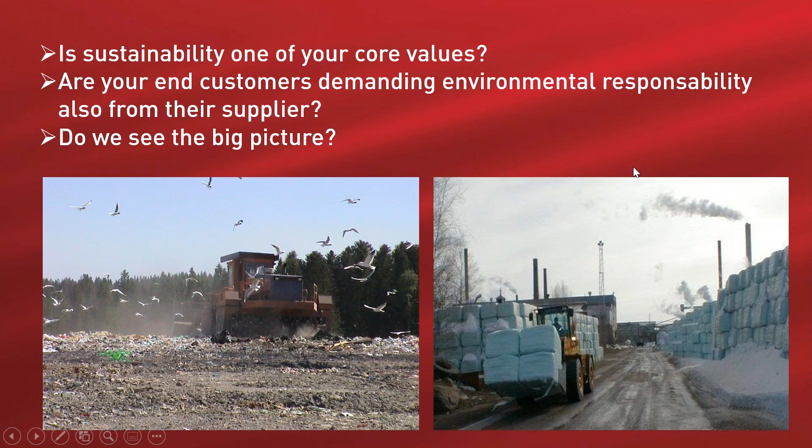You might like me to comment? No, we will go into that in our presentation. All right, you probably remember.

What is the level of efficiency and safety in your material streams, such as your raw material, recycled fiber, pulper reject, and pulp itself? What are the environmental and safety hazards caused by these streams?

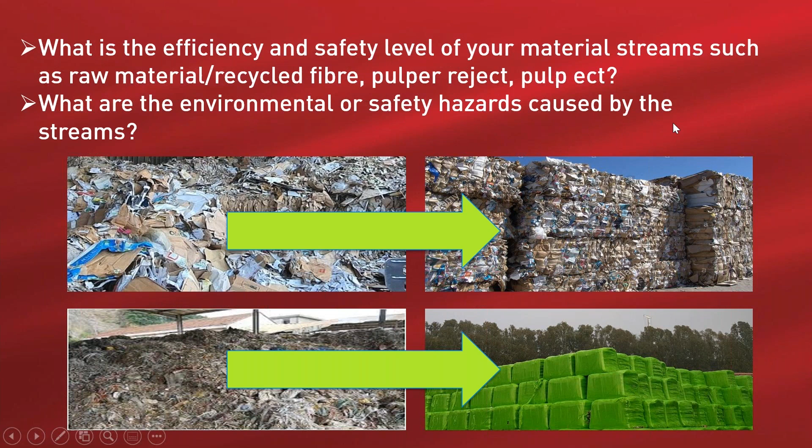So, thirdly, why add metal wires to the pulper process? We have to say that we are not specialists in pulp itself. We just do the machinery before and after, but that's a good question, Martta.

Exactly. And to highlight, we are mostly specialists in recycling. We will leave it to that and come back to it in our presentation.

So what is the economical and ecological cost of letting the wires into the process? Wouldn't it be better to recycle and profit from the bale ties? Just questions. Good question, Martta.

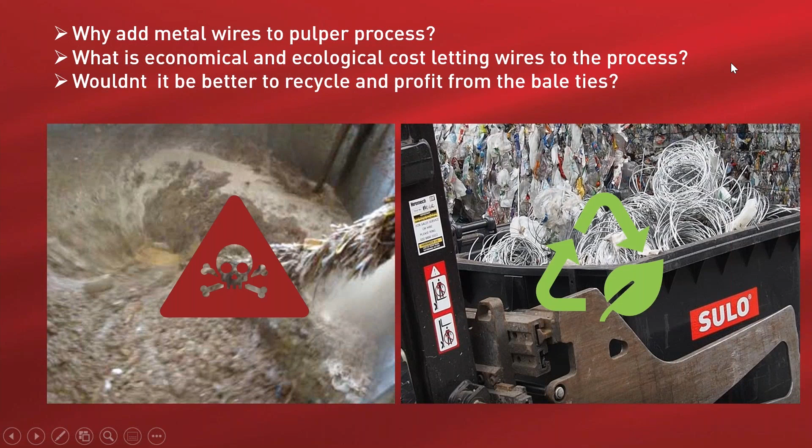All right. And then when we look at these pictures, do we see pulper reject as a valuable resource or costly waste to be landfilled?

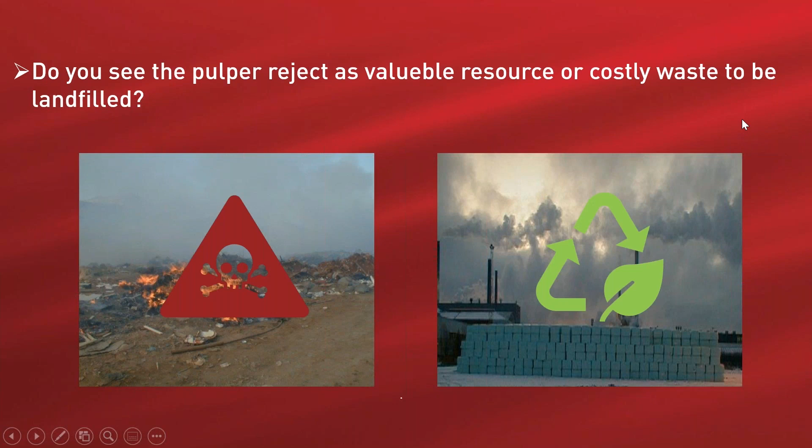So there was our warm-up questions. Okay, we are talking about the zero landfill solution for stock preparation for the reject. And here you see our roadmap, which is kind of invented by us. Well, not really us. This has come along with our customers in the past years that we have been adding services for their requests, and as we saw earlier, there are plenty of customers who are responsible for their operations.

Today we will start from stock preparation to pulper reject handling, reusing the pulp and not ending up at the landfill. Then we will go from the pulp process to the handling of pulp, the efficiency with Cross Wrap solutions.

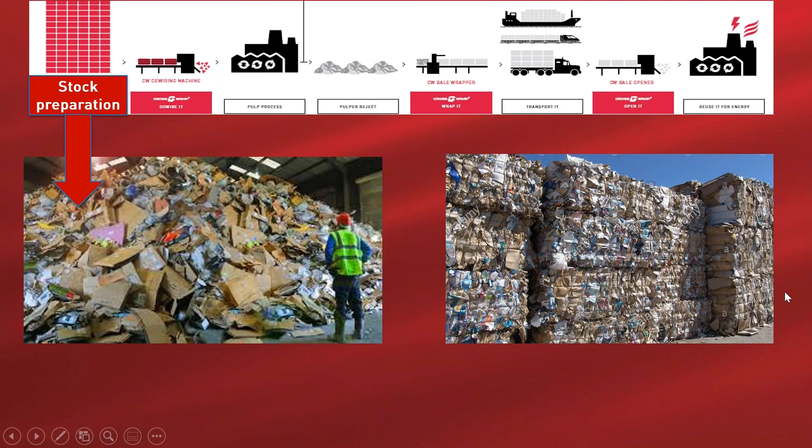Talking about stock preparation, here on the left we see a picture where we can see loose material which either came loose or has been opened to be loose. This creates a possibility for animals and bugs, needs a lot of machinery to operate with, needs a lot of room, and of course with loose material the risk of fire is bigger than anywhere else.

Compare that if your stock will be on decent density bales - it's easier to stock, makes more sense and value when you need less space and need less operators. It's just putting the bales into the dewiring system and getting them in a process, and recycle the wires before they go in.

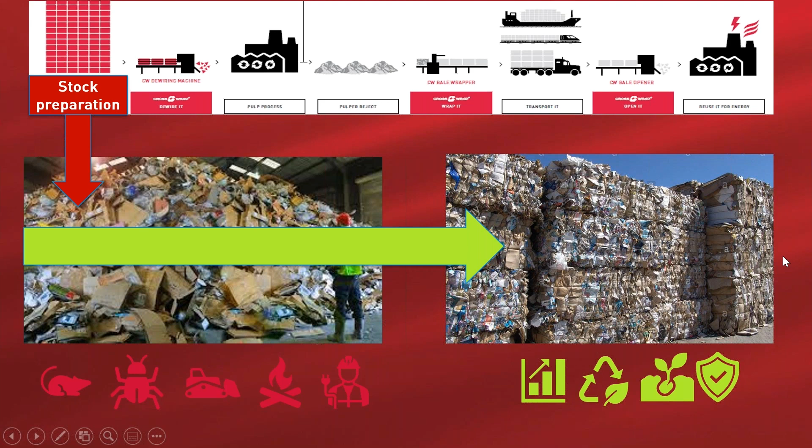Yes indeed. Safety above all.

So after stock preparation, we need to open and feed the bales in some kind of way. With Cross Wrap, we have several solutions for how to feed the bales efficiently and avoid the big loose material causing the problems Kalle mentioned before.

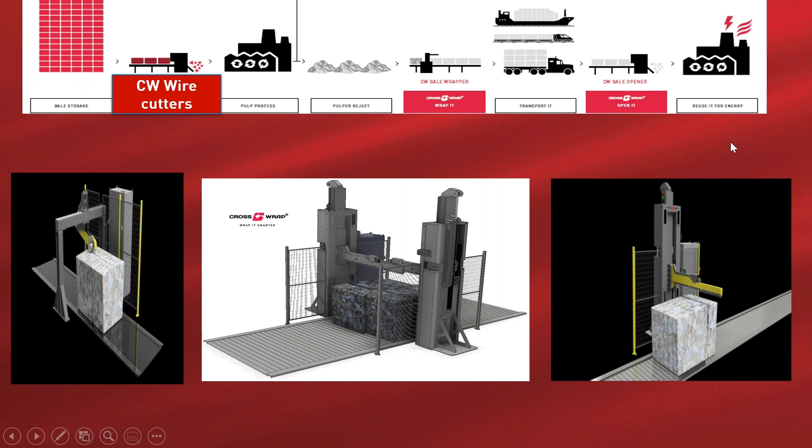Here we can see our wire cutting solutions. We have different kinds of cutters, from rotating upper cutting to linear cutting from the top. But better than me explaining, let's have a look at a video.

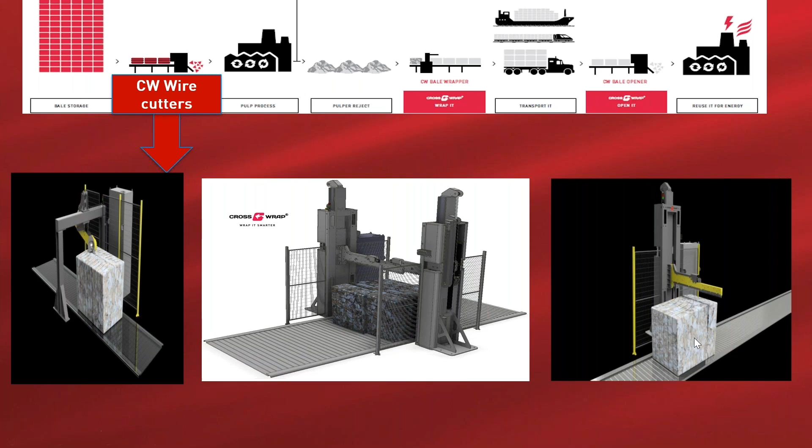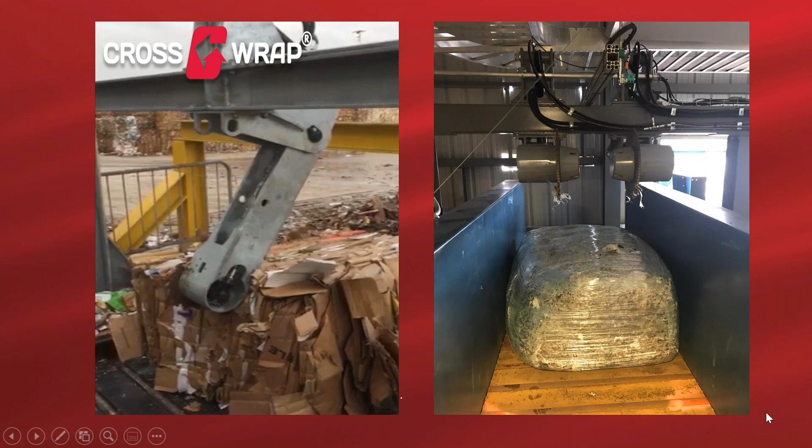So these wire cutters cut the wires automatically. Here it's a system which just cuts the wires on a conveyor. We see a couple of examples from Saica where they cut the wires just before it goes to the process. On the right-hand side, you see Georgia Pacific in Oregon.

It's a great system where they have wrapped bales with materials which might otherwise go to the landfill as an alternative, but here it would be used.

So we will see a video of how that kind of cutter works in both cases - it's just a simple cutter, but it helps by not needing manual operation, and of course creates efficiency for the production of the pulp when the wires are cut upfront, making for easy operation.

On the right-hand picture you saw earlier, a similar machine, but that was cutting bales which are wrapped tight without ties, whereas in this case we use wires.

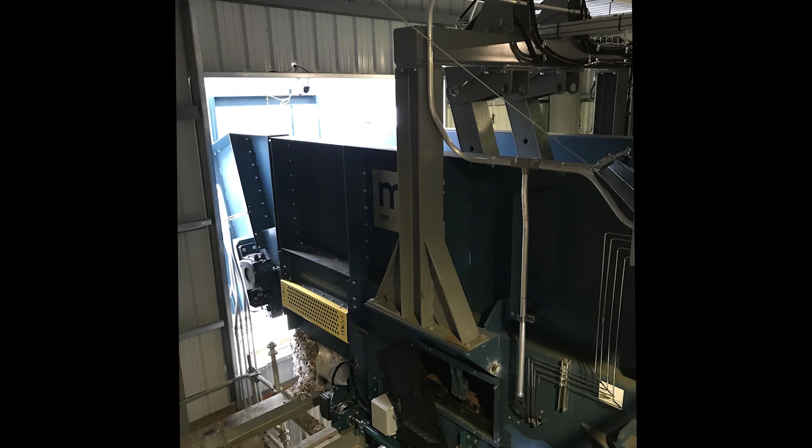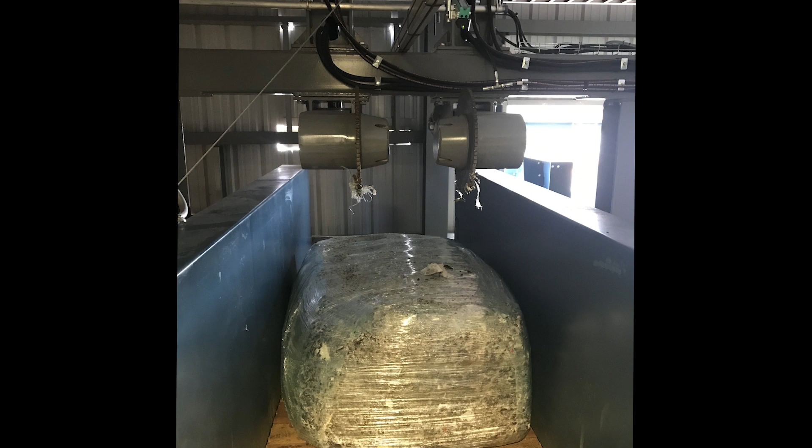So this is just a few pictures of that kind of machine, which we do for - well, it's a similar machine, but it opens the wrapped bale to be used in a process by Georgia Pacific.

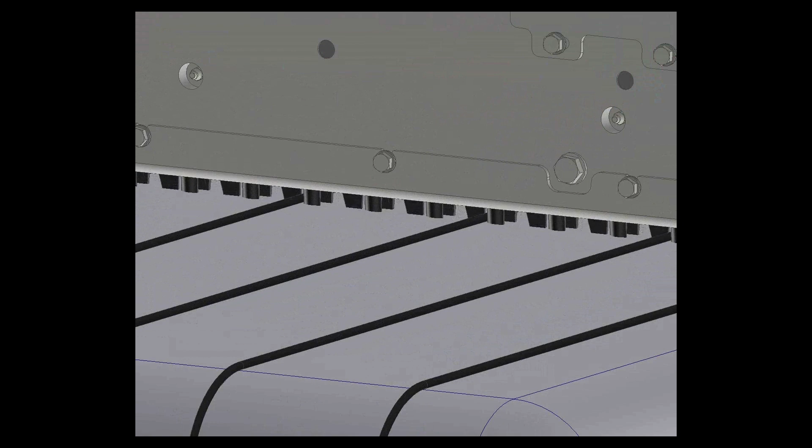Here we have a top cutter, which is the same cutter we use later on - you will see it in this dewiring system. It can be used there too, a similar operation. It's one of those units we have available for automated processing of paper bales or OCC, whatever your bales are, wired.

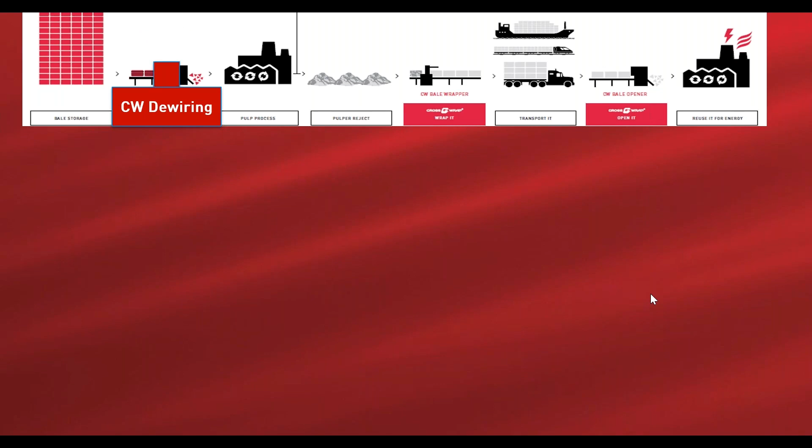And from these wire cutters, we can move on to the dewiring unit itself. When we want the highest efficiency for feeding the fibers, we have developed the Cross Wrap Dewiring, now delivered to over 60 customers worldwide, and it cuts, separates, and coils the wires automatically.

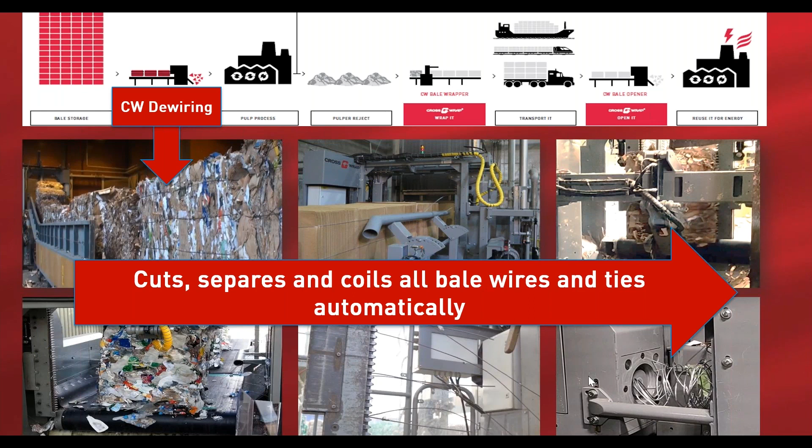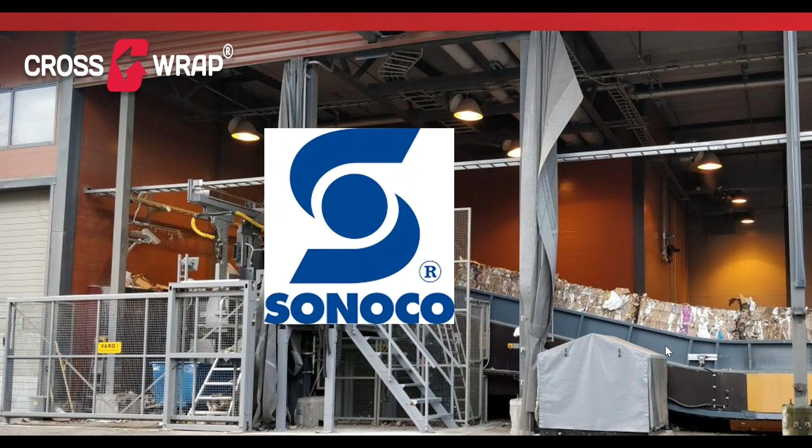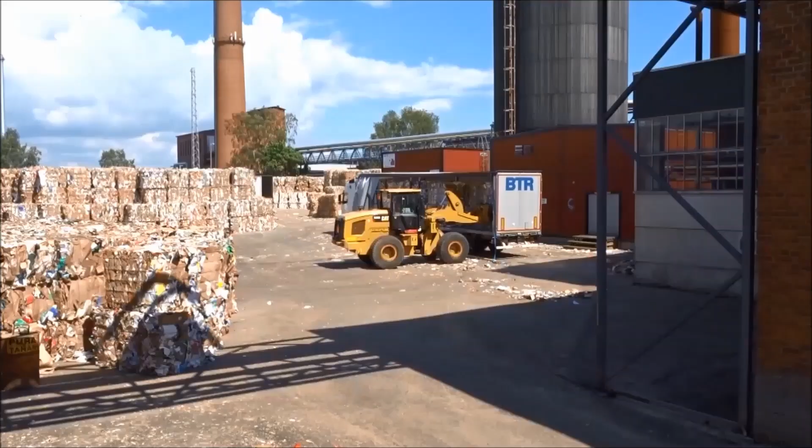Also, to get a better picture of the machine itself, we will watch a video. This video is our reference here from Finland. This is a Sonoco plant here in Finland.

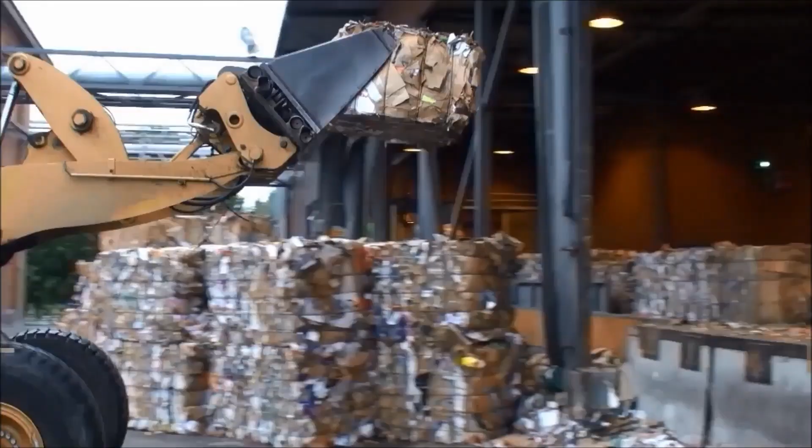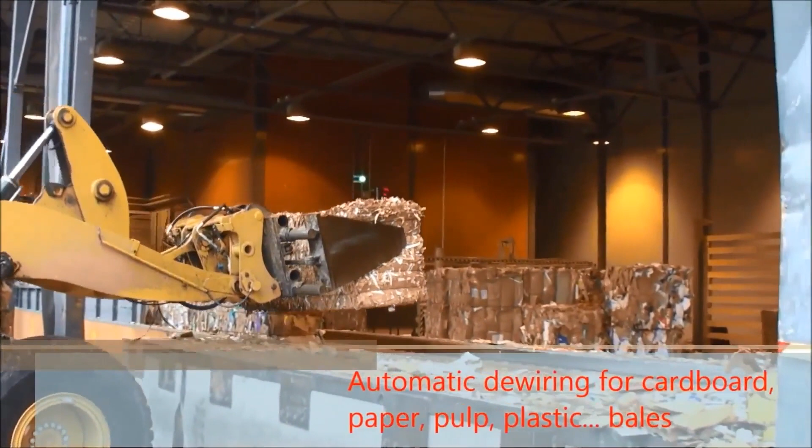In this case, the feeding conveyor itself was an existing one, so we are highly flexible on our dewiring solutions. The dewiring unit itself is very flexible in layout terms and space-wise, also for existing plants. We also provide solutions for the feeding conveyors as well as output conveyors after the dewiring.

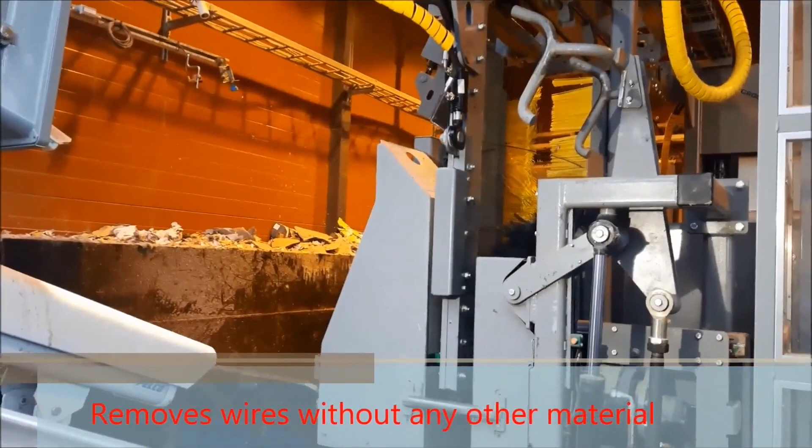How the dewiring works is that we run the bale in with the conveyor. We have grippers coming from both sides, taking hold of the wires. Then we cut from the front with the front cutter. The grippers move aside, after that we move the material forward, let go of the wires from the other side, and coil them up.

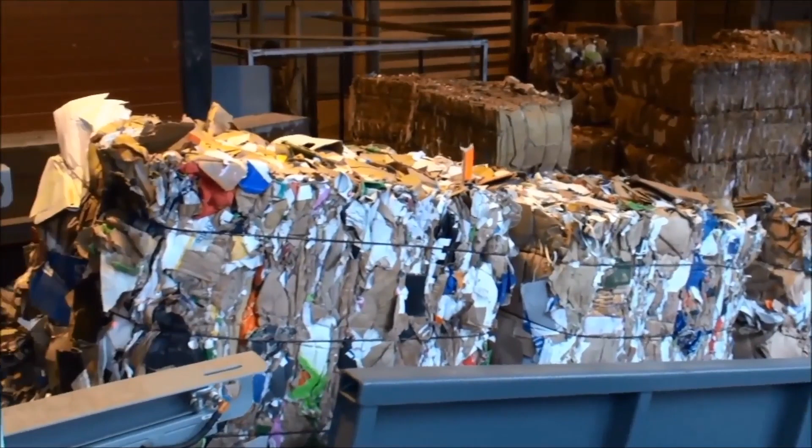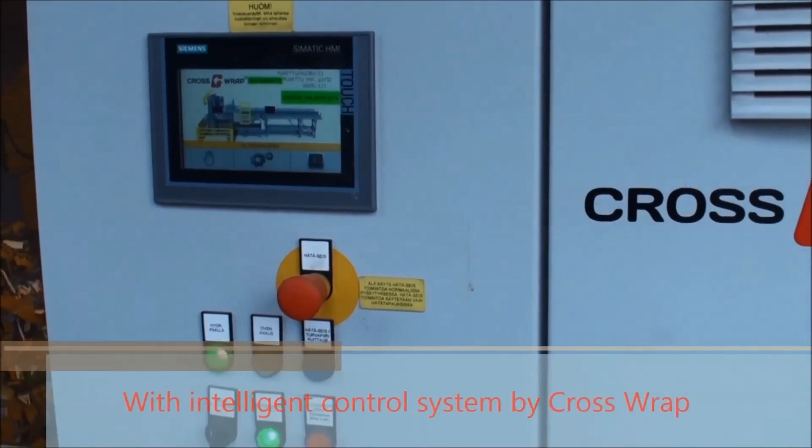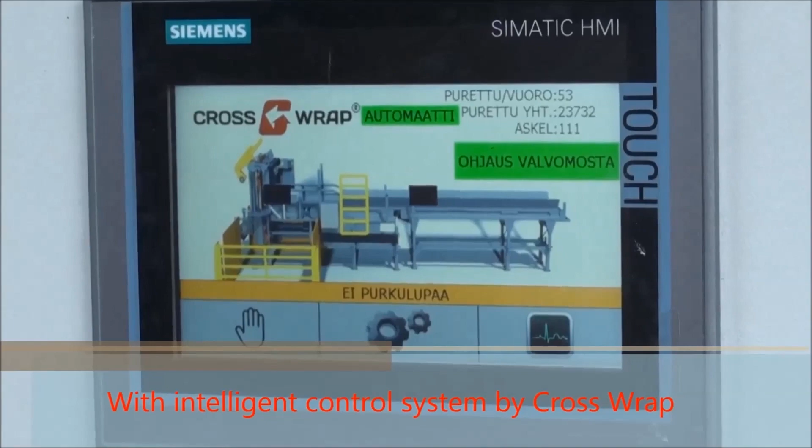Also, the intelligence of this machine is the leading edge. With all of our machines, we deliver a remote access device, giving us the benefit of doing all program updates and services remotely. And we use the newest PLC of Siemens, and as the customer wishes, there are optionals for that.

Yes. So if you have more detailed questions about the dewiring, please write them down for us and we will answer those as soon as possible.

As you did see, the big benefit in our dewiring compared to conventional ones is that we grab the wires and then cut, and then we collect them to the side, which is a big benefit and gives more reliability and a higher percentage of dewiring than machines that have been available before us.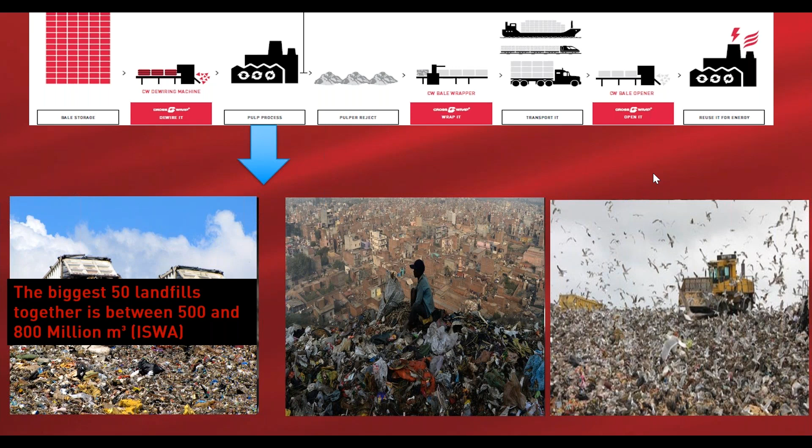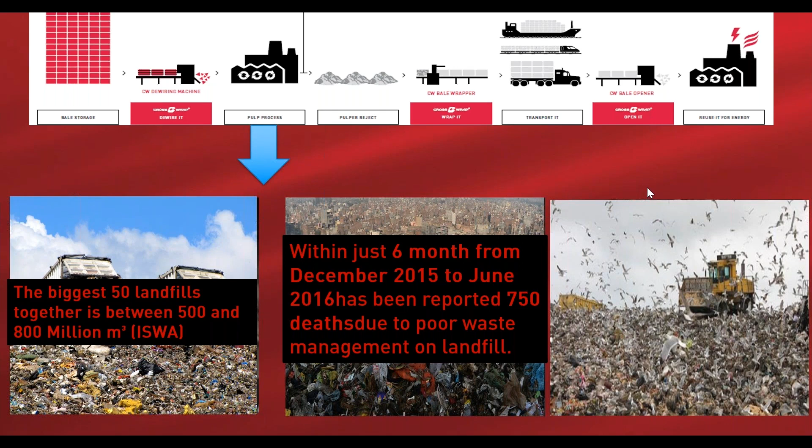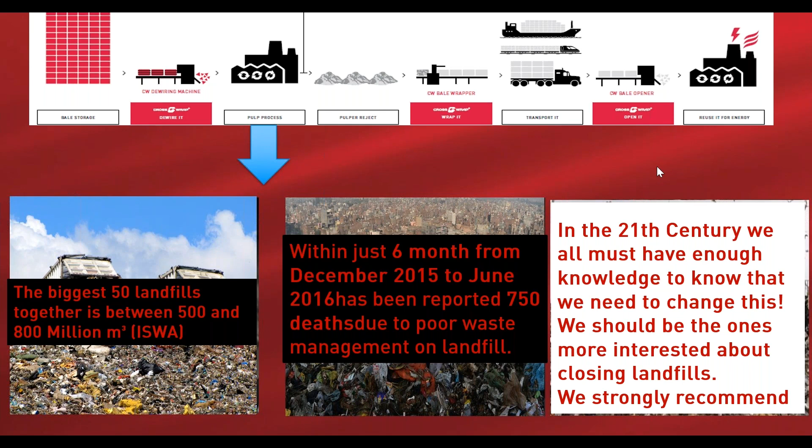A few facts about landfilling today. According to ISWA, the biggest 50 landfills together are around 500 to 800 million cubic meters. Within just six months, from December 2015 to June 2016, there were 750 reported deaths due to poor waste management on landfills. Today we have the knowledge that this has to be changed, and we are here to change it with you. Not to mention landfill is one of the biggest climate change pollution sources on earth.

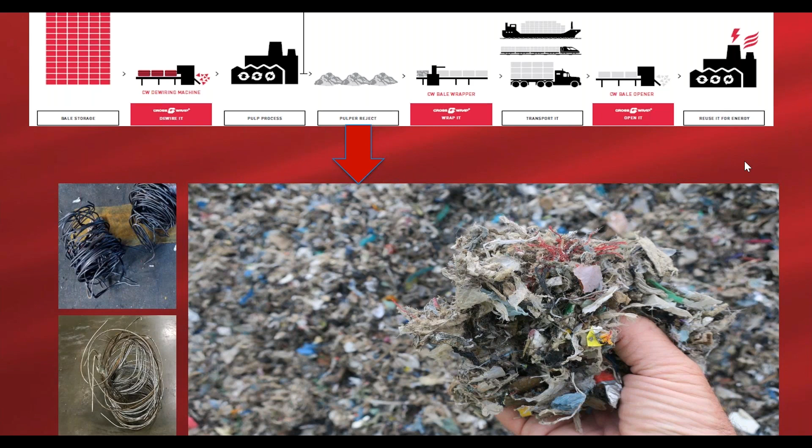Exactly, so rather than seeing the pictures we saw before, we could be seeing this. Instead of costly landfill material, we could be seeing a resource. Is alternative fuel one of the business solutions? We do believe it is, also for the paper industry. Here we see our wrapping systems serving customers for alternative fuels, where we can effectively pack the material in different ways and for different reasons. All this goes for energy use, so it doesn't end up in the landfill. That's the aim of the process.

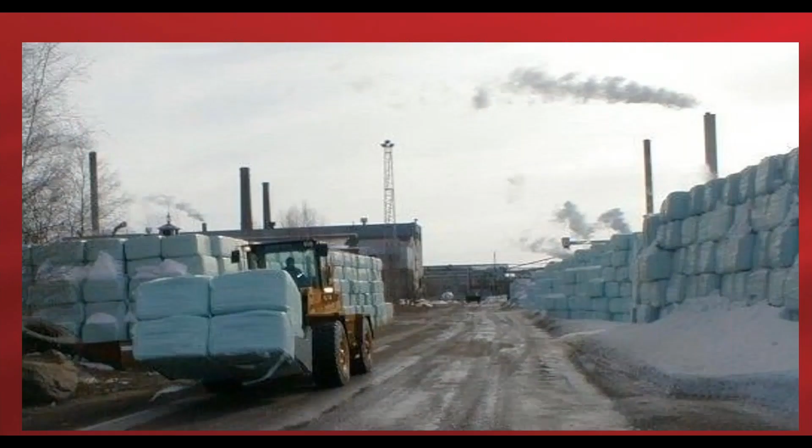Here's a great story from Cross Wrap too. We went into partnership with Stora Enso Varkaus 25 years ago. We made the baling and wrapping plant for reject there, where they use the reject as fuel energy for their process, serving the community with heat for district heating. Even with 8% aluminium in that material, there was an innovation for recovering that aluminium for recycling. Only the burnable material goes for energy, and even the aluminium is recycled from those bales. That's a great story of zero landfilling.

Yes, indeed, and they use that material as their own resource, right? Yes, they do. They take the benefit from it, make energy out of it, and sell the wires and the aluminium.

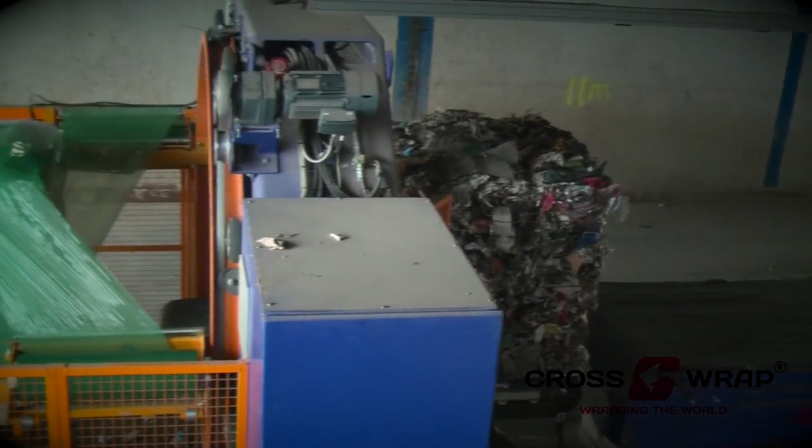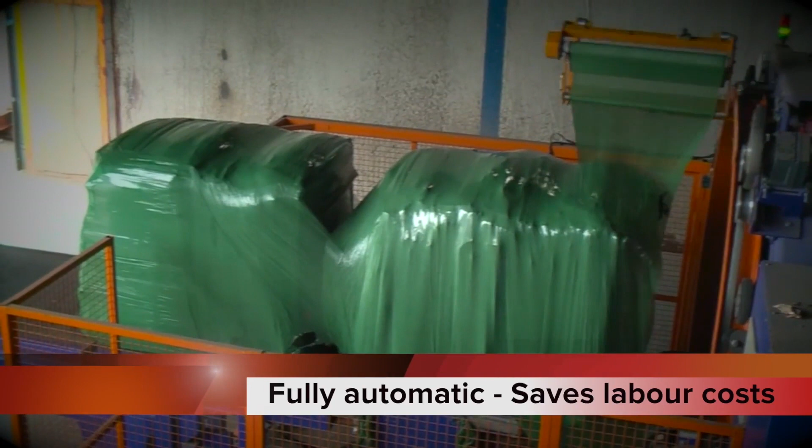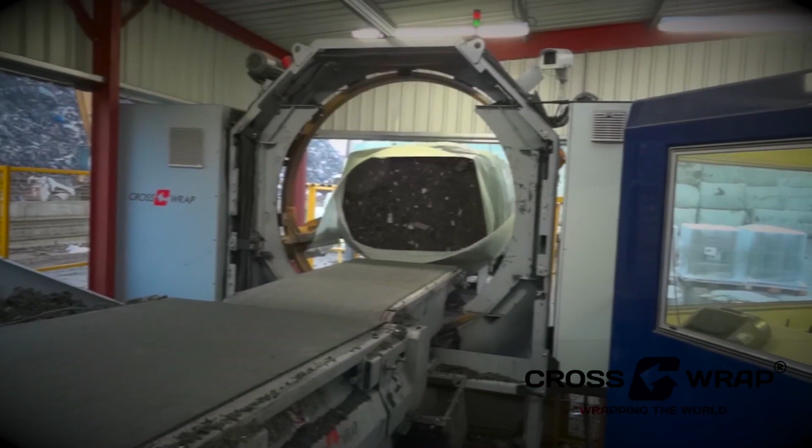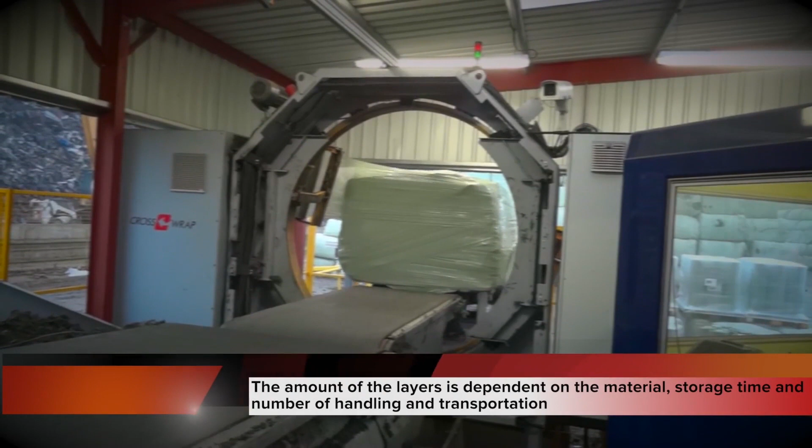And here we can see the machine behind it. This is the wrapping machine 2200. Its function is that we can install it with any horizontal baler. Once the bale comes out from the baler, we do the vertical wrapping. After that, we do horizontal wrapping, covering the bales 100% hermetically, so that the valuable resource of alternative fuel maintains its highest possible energetic value. It's very important that the bales are filled with an airtight package so the energy value remains. For example, those bales you saw earlier were stocked 5 to 10 years before they were used, and the energy value remained, with no environmental impact to the neighborhood. That's very important, and we are proud of the system doing that.

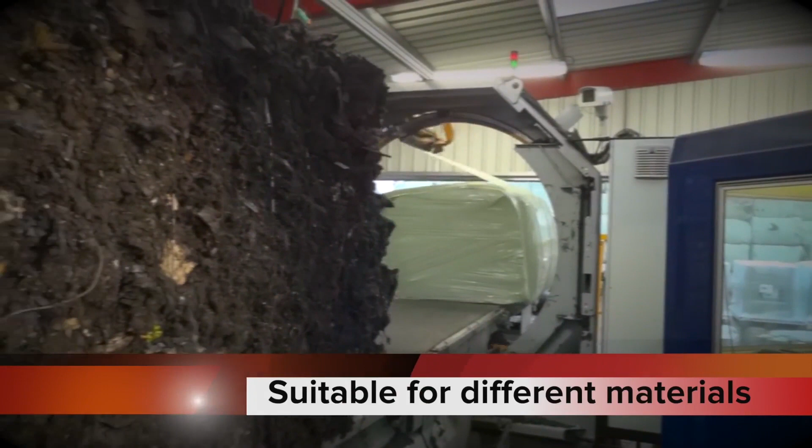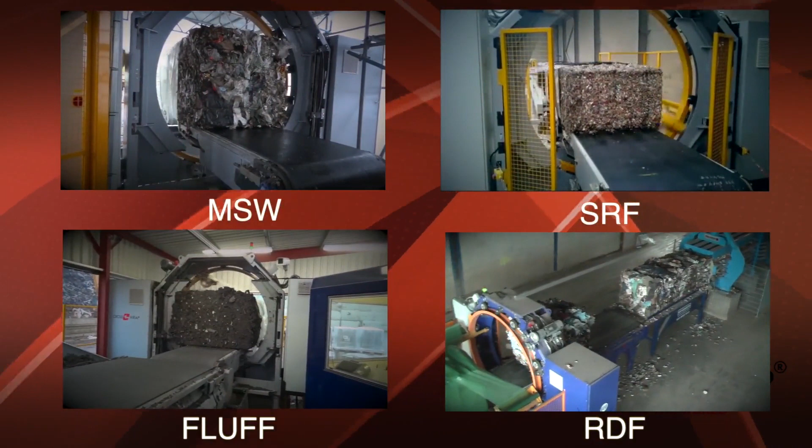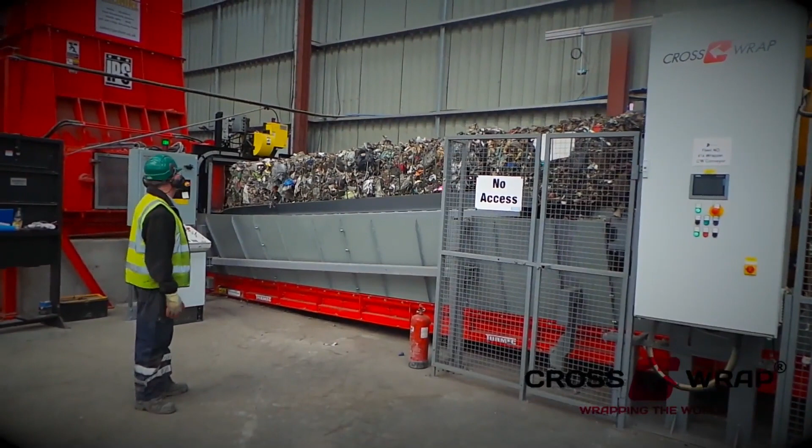There was also a question about the mobility of our machines in bale opening, dewiring, and wrapping. All units are also available as mobile systems. The system you see here, we even have today - that 25-year-old machine at Varkaus is standing by at a paper mill, ready to work any day. It's not working every day because some of the material goes straight to the process, but when more material comes out, it will automatically bale and wrap. It's really a 24/7 operation machinery.

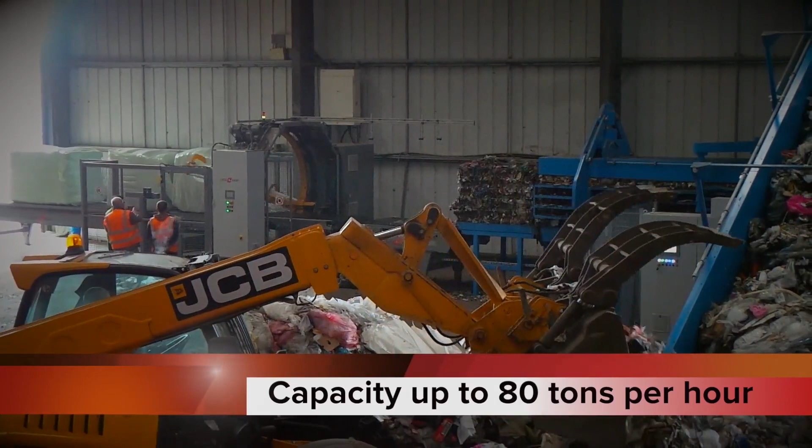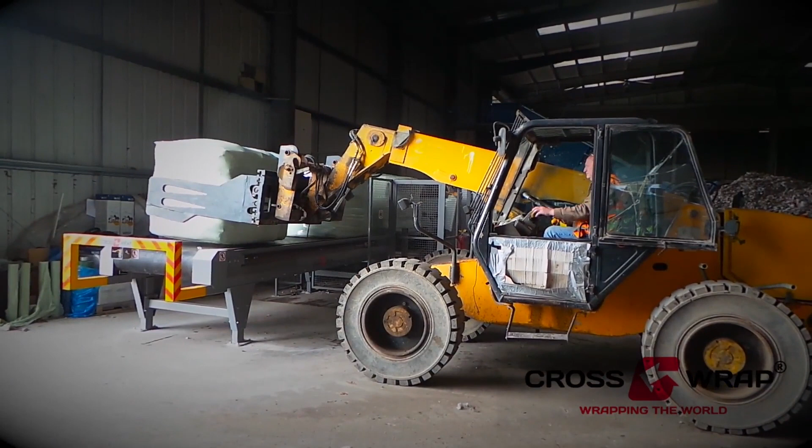And if we have that ragger rope as a reject coming out from the pulper, we also have a project in Turkey wrapping the pulper ragger rope, right Kalle? Yeah, oh yes we do, with similar machinery.

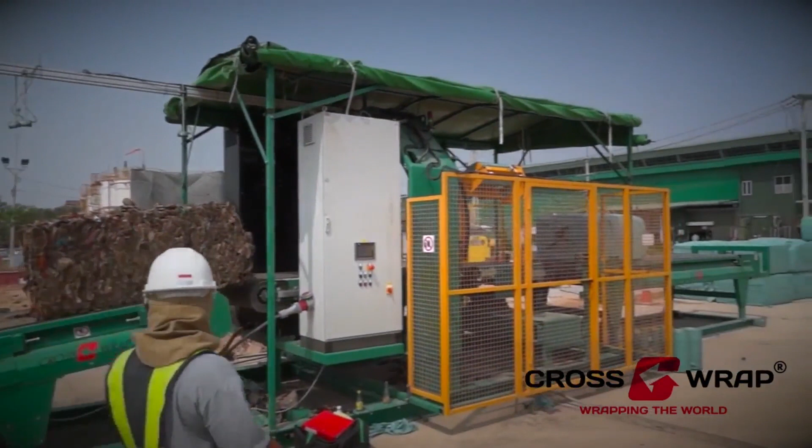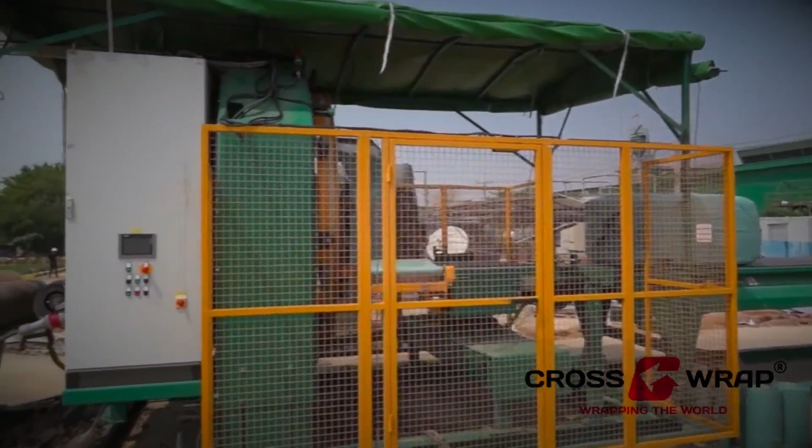Here we can see one mobile solution for the wrapping unit. That's Thailand, I guess. Yeah, with a pickup frame, right? Yeah, it is. So that is the solution for keeping and maintaining the best possible energetic value in the alternative fuels.

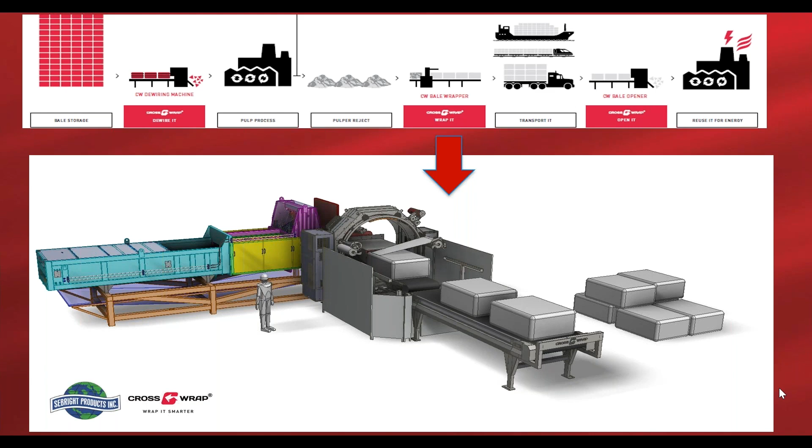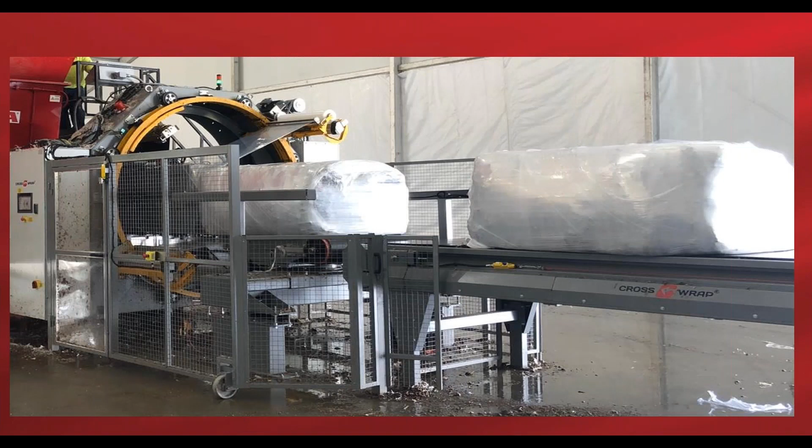Here we have another solution for the pulper reject. Would you want to tell a little bit about that, Kalle? Yeah, that's a system for squeezing the moisture out before wrapping. That was an extruder by Sebright, and we have a direct wrapper behind it. It's a kind of closed loop system where the water goes back to the process, and the material that comes out doesn't have any metal ties or anything - it just has the wraps like here.

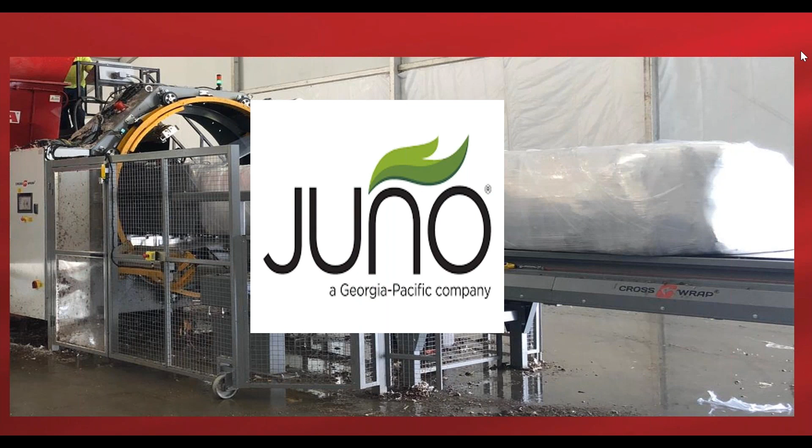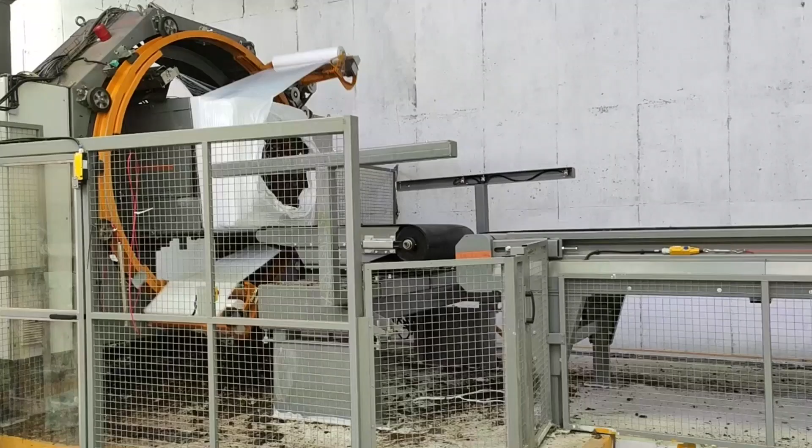What we see here is a Juno plant in Oregon, where they bale and wrap the material directly for their own plant to produce materials again, saving a lot of material from going to landfill.

Nice system. This machine is doing reject baling in China for use later on. It's a nice, neat, clean system after the paper industry or whatever the process is, and we can wrap and pack the materials. It's used for pulp too.

Whatever you can bale, you can bale more with the wrapping system. In this case, no ties, just a net and film, which makes a neat, nice package and stays clean for storage, export, or use, whatever shipping method you transport your material with. Those bales are nice to take further on.

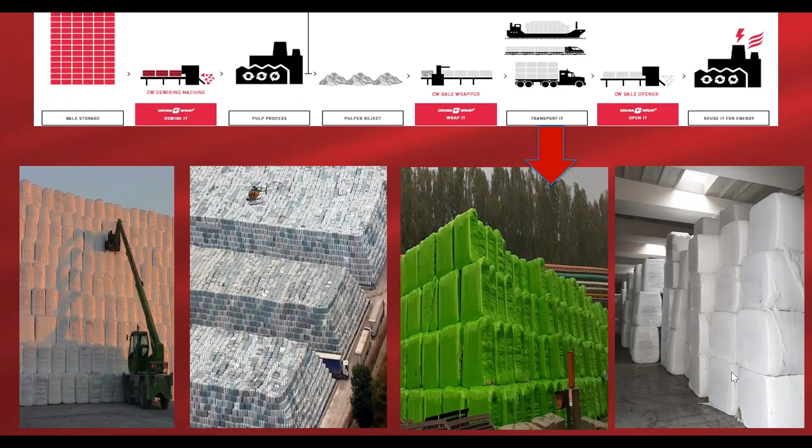Yes, indeed. As Kalle mentioned, here we can see some examples of storing inside or outside. The cross-wrapped bales are environmentally friendly without polluting or affecting animals, pets, and so on, and keeps the raw material clean.

Also, when coming to transport, the transport is efficient and clean. Yes, it is.

So then, once we have fed the line, we have taken the wires out with dewiring, we have turned our reject into a valuable resource and not landfilled it. Then we have wrapped it, stored it, and now it's going to transport.

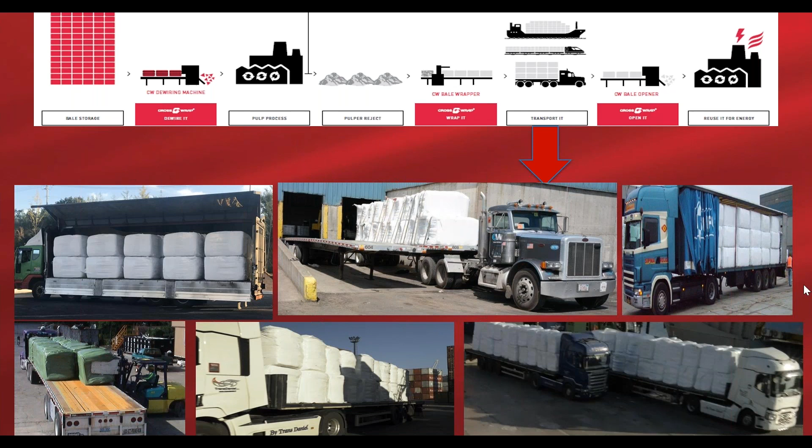Since we did the bale wrappers, we felt responsible for also doing the bale opening machine for those who will use the valuable resource. That came out from the customer again, our partner customer asked how to open up the bales, and there was nothing available, so we had to invent the system to open the bales.

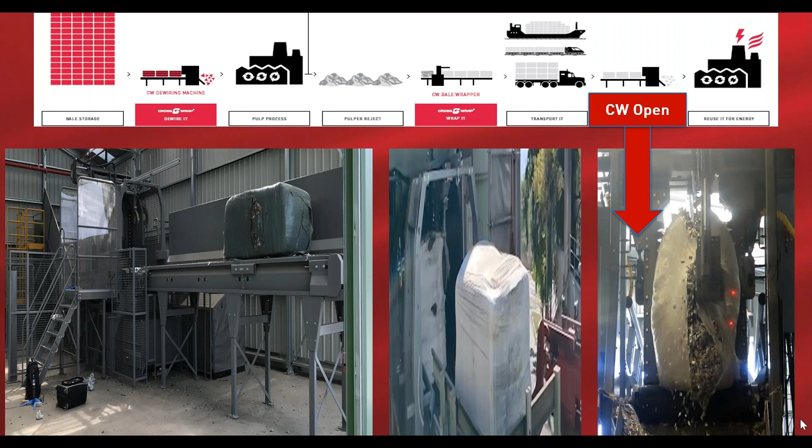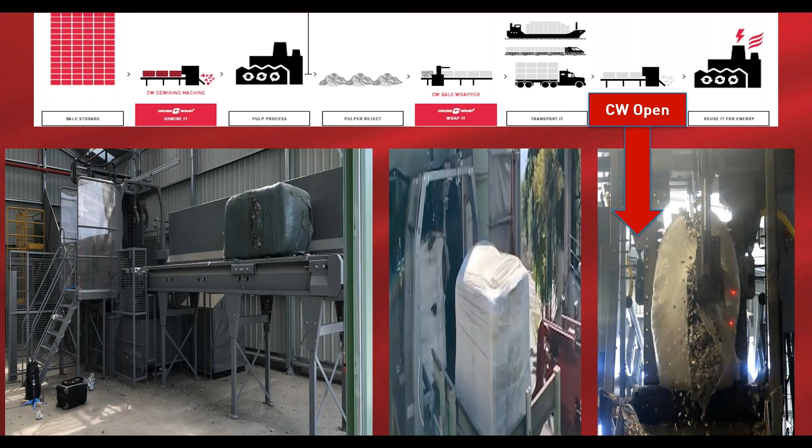At the same time, we were already thinking about the dewiring, and today the same machine with a few extras can open up the wrapped bales, but it also dewires the bales, all in the same unit.

From this video you can actually see the similarities between the dewiring and the bale opener, which today is actually one and the same with a few options, not even modifications. So we call it the bale opener, but actually it's the same dewiring system.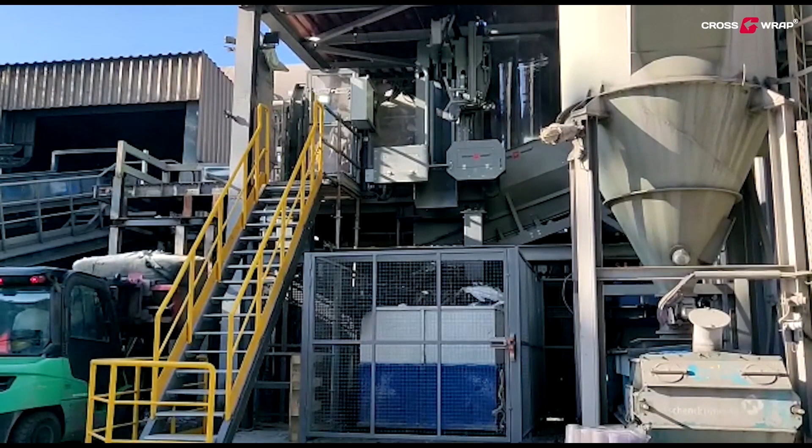It has two cutters that, before the process starts, cut the film from the down and up side before it goes to the conveyor to remove all of them. The same machine removes the ties and films, or if there's only films, it removes them, or it can be used for dewiring too, which is quite handy.

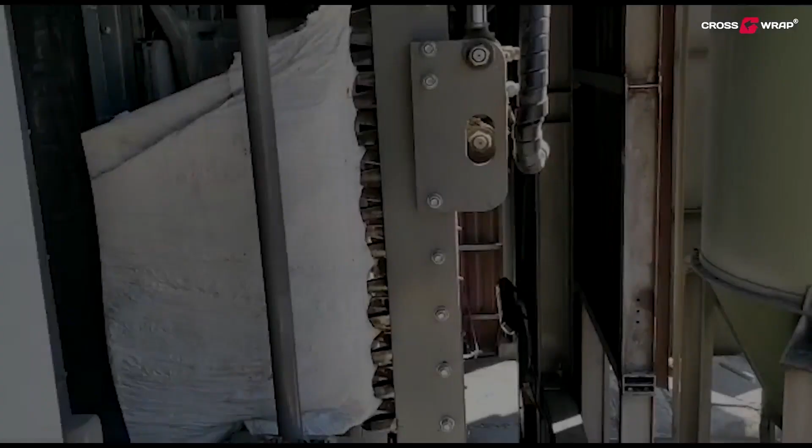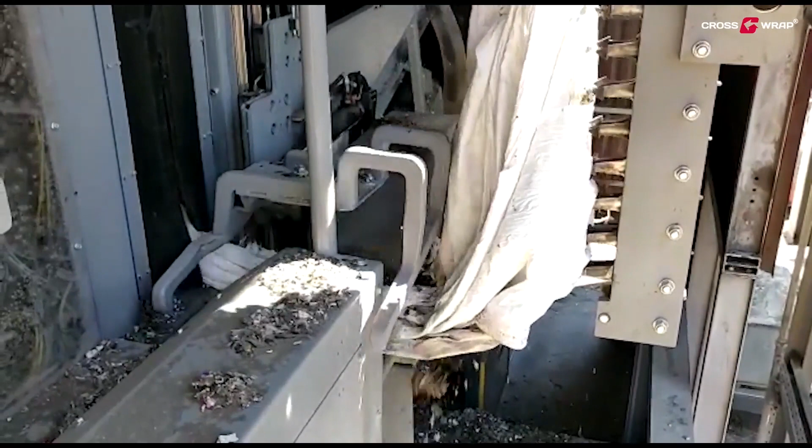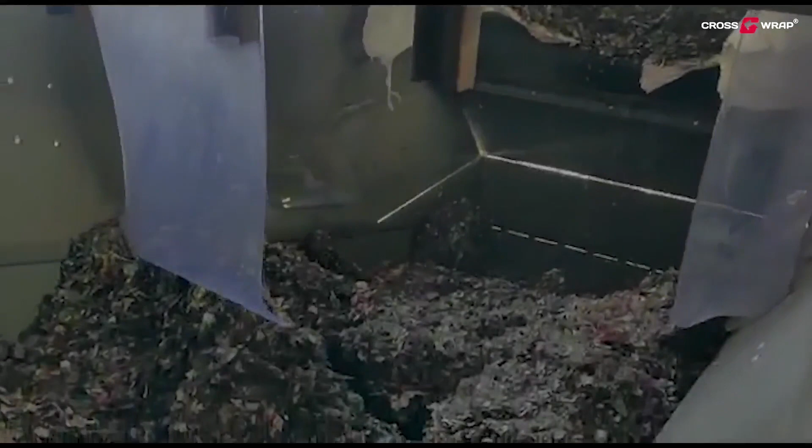It can handle films and ties, or only ties. For example, the dewiring system US customers are using can handle whatever, 20 galvanized wires, no problem, it works with those. Or if you have films, it works with them too, or straps or rope.

So once we have opened the bale, the valuable resource goes to use. That was, by the way, the cement example. Yes, indeed.

So then moving on in our process, we have opened the valuable resource to be used as energy, as said, which can be used in cement kilns, waste to energy, or alternatively district heating, or wherever it's needed, but we are replacing other fuels that are not renewable.

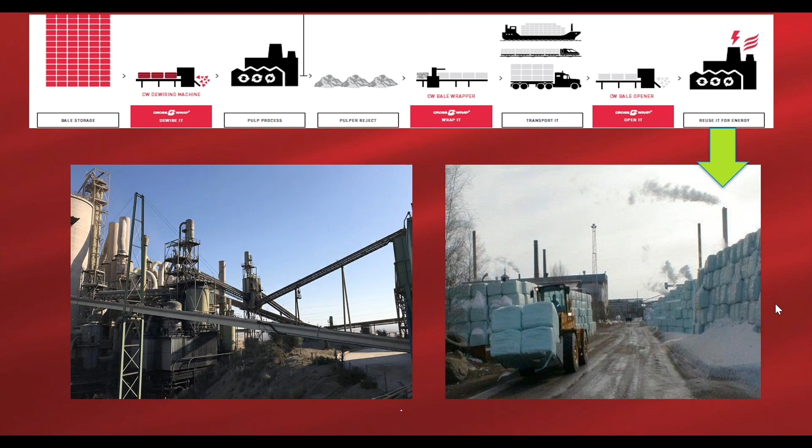Now we have covered the roadmap from bale storage, from stock preparation to the pulping process, from the pulper, from the reject to using the reject as an alternative fuel. Then we go upwards in our roadmap, to the actual handling of the pulp and the efficient solution we have for that, and not to forget, environmentally friendly too.

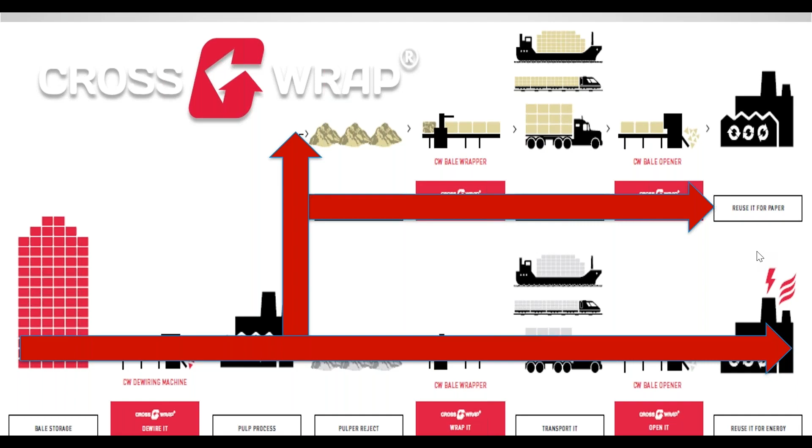Here again we are in an area which is not ours, talking about pulp, whether it's wet lap or just a loose material and so on. But if it doesn't go straight to the process, it has to be moved and stocked, then reused when it's needed.

Our understanding is that to make this process easy, we can wrap that wet lap, or there is a possibility to bale it with a twin ram and direct wrapping.

So we can make nice and clean packages out from the pulp, which is actually used already for that kind of process, and it will be more cost effective. We are happy to talk about that with you if you have questions later on.

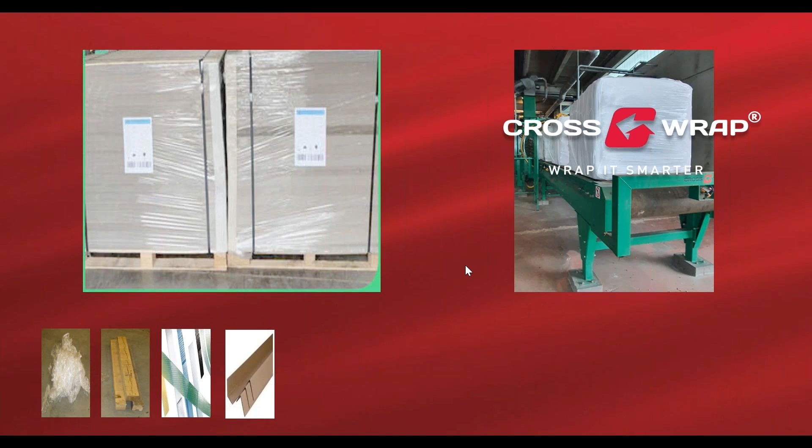Starting from the left, we have plastic, where the consumption is not exactly optimized - maybe you can see the air bubbles. And of course, if it's not wrapped tightly from 6 sides, it's also not 100% weatherproof. Is it airproof either, as Cross Wrap is? No, it's not - if its bottom is open, you get moisture in and dirt in, so it's not the same thing. You get a bit like an Amazon inside if you go through different kinds of temperatures.

Then we have a pallet underneath of wooden material, which again is nailed - it's not pure for recycling, it has to be processed because there are nails in that wood. Then we have the straps, and you can see some corner protection. Then we have a sticker labeling, which means that's hazardous waste, isn't it, Kalle? Yeah, it is - well, we have a possibility to put the paper between the layers if needed. Indeed, if we use the transparent film, we put the label in between the films if wanted, so we don't need to create hazardous waste. And then sometimes there can be some side boards or covers as well, and in this case I think there's a top board. With Cross Wrap, we can provide you the solution with the film only, or film and the net.

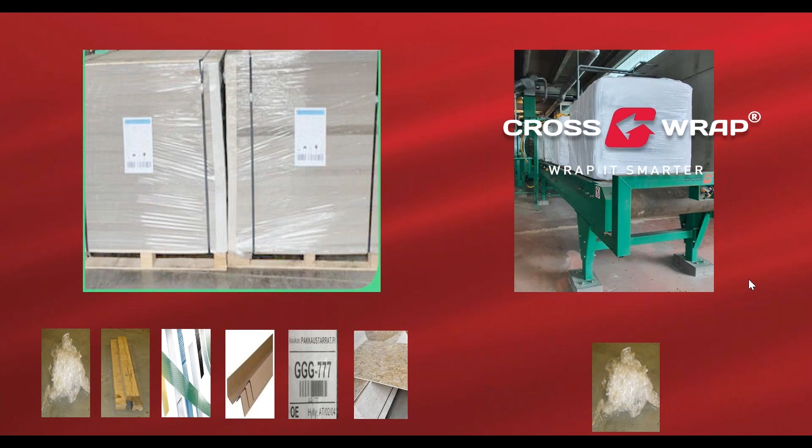Well, we get this question quite a bit - but you are wrapping in plastic, where is the sustainability in that? Well, as said, we come from the waste and recycling industry, so we take this question really seriously. A few facts about this: the film that we use with our wrapping machines is 100% recyclable. Also, there are films available that in the making process have used recycled plastic. Also, as seen from the previous slides, we use less packaging material, so the recycling process is lighter for the receiver of the package. That's right.

Lowest film consumption - our wrapping machines come with 4 different wrapping programs, and you can optimize the use of the film according to your needs. Kalle, you're putting up your hand. Yeah, I just wanted to say that this Cross Wrap system, this 3D wrapping we are doing, is really something else - we do vertical and horizontal wrapping in one process, and we can optimize the film on the corners or where it's needed, and it seals 6 sides, securing the package. Indeed, putting the film where it needs to be durable for your handling, transport, and storage.

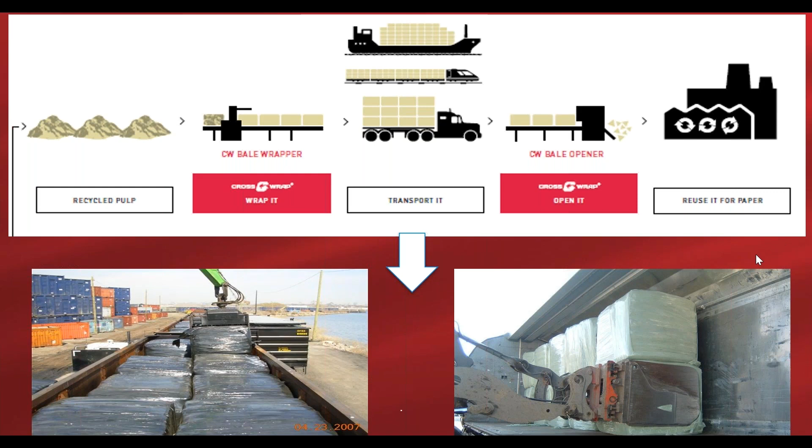So then the material has again been transported. When we need to open it, we have the bale opener, which is basically the same machine as the dewiring unit. For that, I will show you guys a last video from our latest installation in the US.

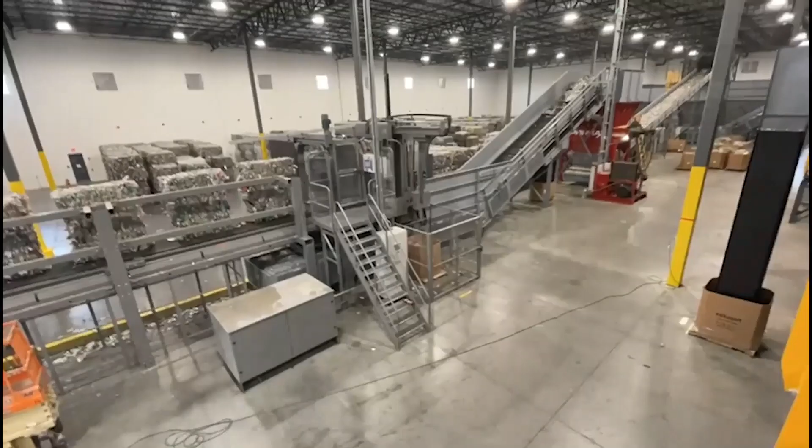Here we have a site recycling plastic. The beauty of the system is that it's fully automatic. You just keep feeding with the forklift, and the machine will dewire it. Your material can be paper, OCC, plastic, organic material, pulp, and so on, and it can be wrapped or only with wires. We can build a system for you to work 24/7 automatically, saving costs and giving you a clean raw material.

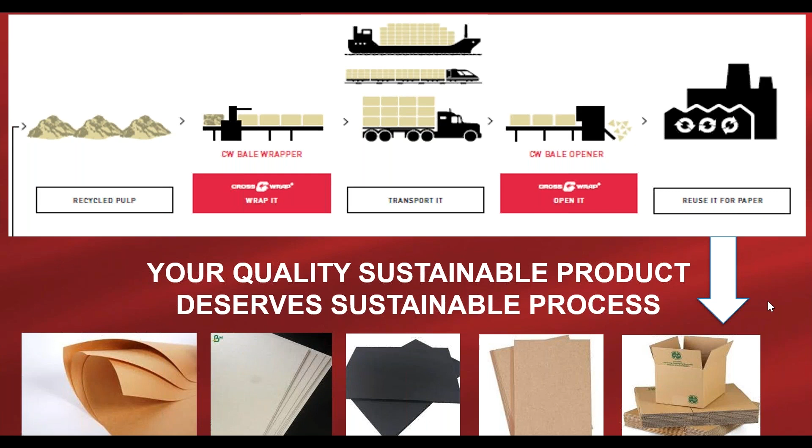So to wrap it up, we have come to the final step of our roadmap of zero landfill solutions for the paper industry. Our message is that your quality, sustainable product deserves a sustainable process, and we are happy to provide those solutions with our experience to you guys, and talk more about it in online one-to-one sessions.